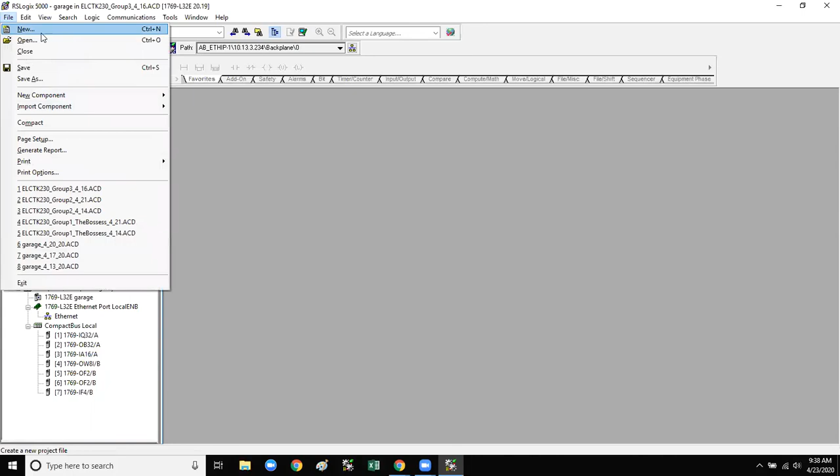Do you remember how to do that? Go to main program on the left, go down, down. I had not seen it, under the folder tasks, main task. There you go, stop, go to main routine. Right below, yeah, really hard to see. There we go, all right.

No, I don't remember that. All right, so we have two exhaust fans or just one? Those are move bits for our one exhaust fan.

5-second timer. So we have our green push button in, right? Yeah.

So the problem we were running into last time is it is off. The done bit goes off for such a short period that it just restarts the timer on delay. So you're gonna need to figure out.

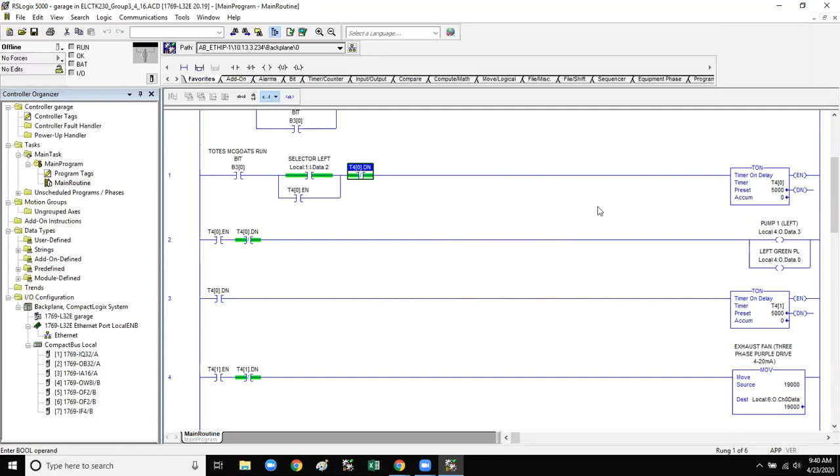Do you guys want to run it and see what it's doing? I remember what you're saying, Nathan. Yeah, go ahead and run it. Give me just a sec.

Gotta go get a tissue.

No, no. So go back, no, all right. Just let go, let go of the mouse. All right, I am, I will save you. All right.

When you hit upload, you're taking whatever program is in the PLC and pulling it into your file. Oh, I thought that was downloading. If you would have saved that, you would have erased your program. Yeah, it is the opposite. I forgot.

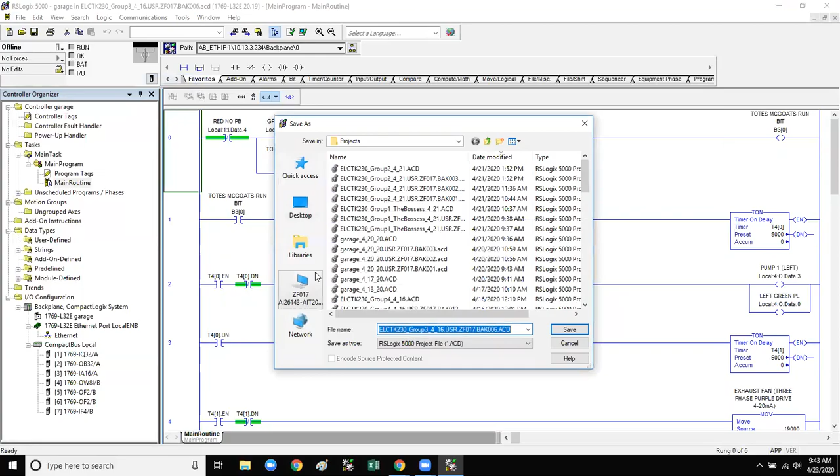Why'd you tell him? What? Why'd you tell him? We could have just stole theirs. Yeah, you're right.

Why is the name invalid?

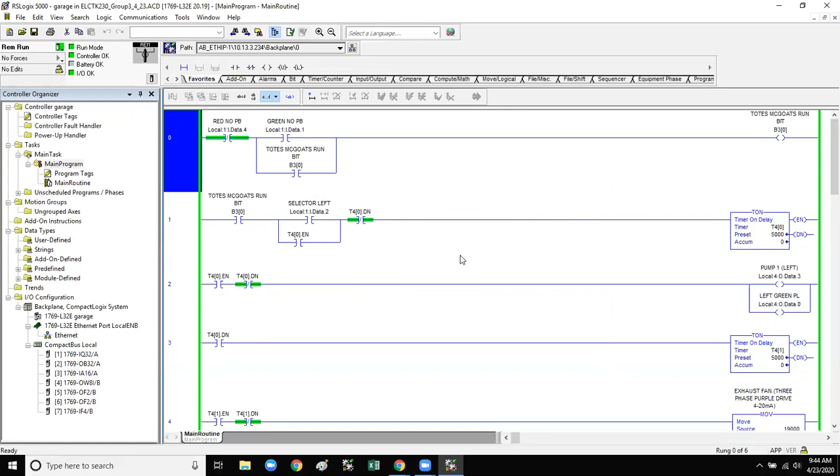You need to figure out how to turn it off completely without it starting back up, because it has such a short delay. So,

And what is that restarting? So our timer T4[0] done bit is like, what is that controlling? Huh? Oh, so our pump 1. Yes, yeah, it controls pump 1.

And so the done bit, I don't know why I don't remember. No, it's fine. The done bit, basically, what will happen is it won't turn it off because it's such a quick response time that it just energizes again real quick and enables it so it never hits a done bit.

So the alternative is... add another timer? No. Well, yes, we could do that. Or, or a counter.

Sorry, my dog just threw up on my blanket. Yeah, we could do a counter. We could do a jump feature where...

Wouldn't that just restart it all over again? Timer? Because you'd jump the logic down to where you see that T4[1] done bit. Yeah, and then they'd work off each other.

But we're not there yet, we have to figure this out. I wish that logic worked. So...

Hey, we got it. All right, what are we doing? Oh, we got to run it. Okay.

So what is it supposed to do now? It's supposed to pump water into one tank, heat it up, and then pump water into the other tank and cool it down.

As of right now, I thought we just had the left selector switch running pump 1, and then that would turn the green light on. And then, yeah, we do. That's all we have run for right now, pump 1, the exhaust fan will run. Left.

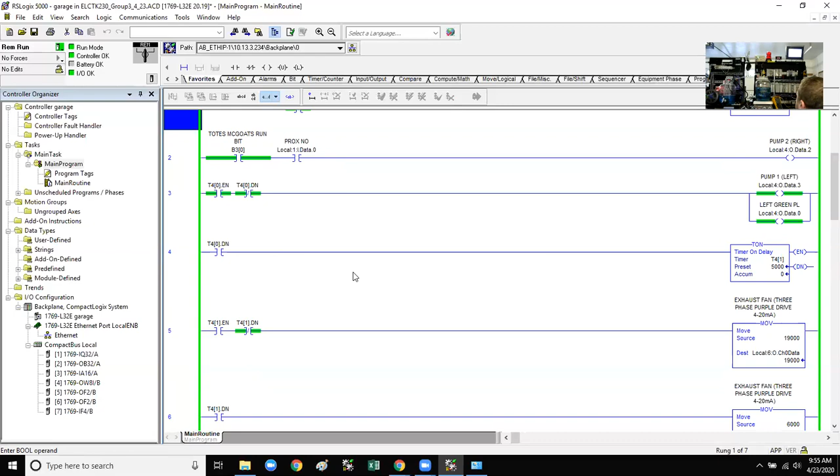What's going on there? Don't know. Where's pump 1? Pump 1's on rung 3. T4[0] enable.

Is it because... rung 3?

Alright, so on rung 1, that turns it on. And then would the done bit in rung 3 just reset it? Like we keep it on? But no, because the enable bit on rung 3, the way I'm seeing it, nothing is shutting off pump 1, which is on rung 3. It's just the enable and the done bit.

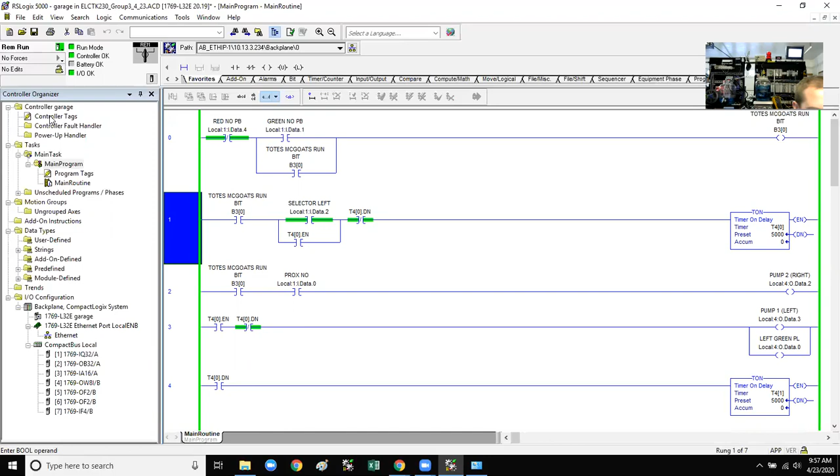Is it because the run bit is on rung 1? What's the run bit? What's that controlling? It's not the pump though. It's like... no, control on. Okay, alright. So pump 1's only on rung 3?

Yeah, pump 1 is only on rung 3. The left green pilot light turns on. I'm not sure what we're doing with T41 down here. That's our... that will control the exhaust fan.

But I guess we could just use T40 because it's also 5 seconds. So the exhaust fan is supposed to be on while pump... After 5 seconds of pump 1 running, the exhaust fan will run - oh, for 5 seconds, I got you. Well, let's not worry about any of that right now.

We got to figure out why this pump is not turning off. Pump 1 left, T40 done. I guess, why does it keep...

Why does it keep counting? It's like always enabled. Not sure.

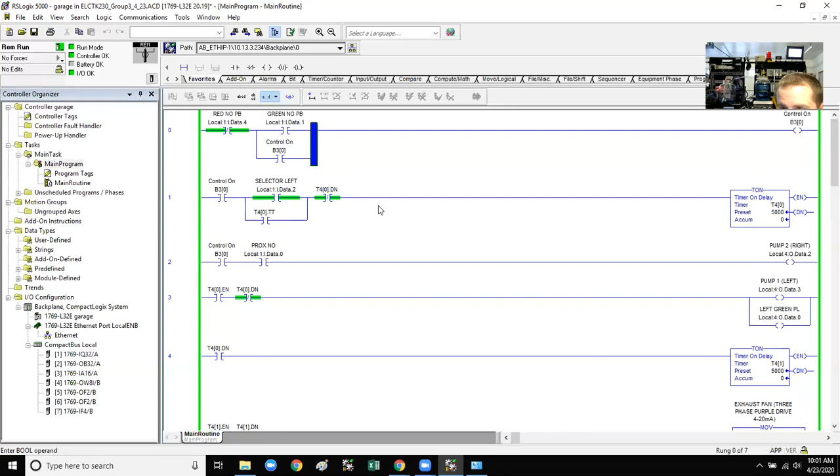The fact that that selector left switch is... Would it be easier if it was a push button? Yeah, it would be easy. I mean, we can do this. I'm just saying, why don't we switch the selector left to a green push button, and so on and so forth.

So we need to change this. But would that mess up our right selector switch? Wouldn't we run into the same problem? Well, what we can do is have selector switch left be pump 1 process. Okay.

Couldn't we just hit the selector switch left for 1 second? Or would that just be too complicated? Well, then you're relying on the operator to know that you can only have the selector switch in that position for a couple seconds, and then you got to turn it off. That's fair. It doesn't make sense.

So why don't we say selector switch left starts the pump 1 process. Green push button runs pump 1 for 5 seconds - left green. Okay, so then all we have to do is change our green push button. We have a green push button as control on.

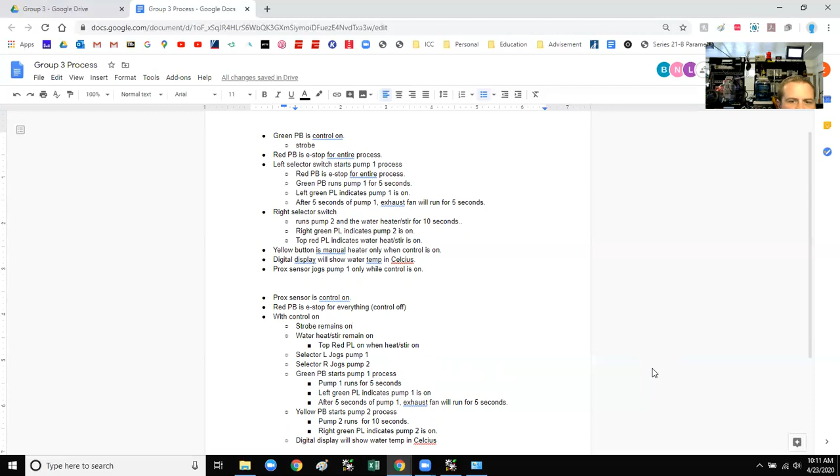Okay. We got a lot to change. Yeah.

All right, Brady. All right. So first step would be control on with the prox sensor. Hang on, I want to move this so I can read it while you're working. All right.

Yeah, I'm kind of doing the same thing. So, all right, if I can make this bigger, if you want. All right, cool. All right, so let's just go rung by rung then.

So rung 0, red push button. You got a control on bit, so that's good. We have the red normally open. We do have prox sensor. So just change - green push button with prox sensor.

Yeah, and do you see the prox sensor on rung 2, you can just drag it up. Yeah.

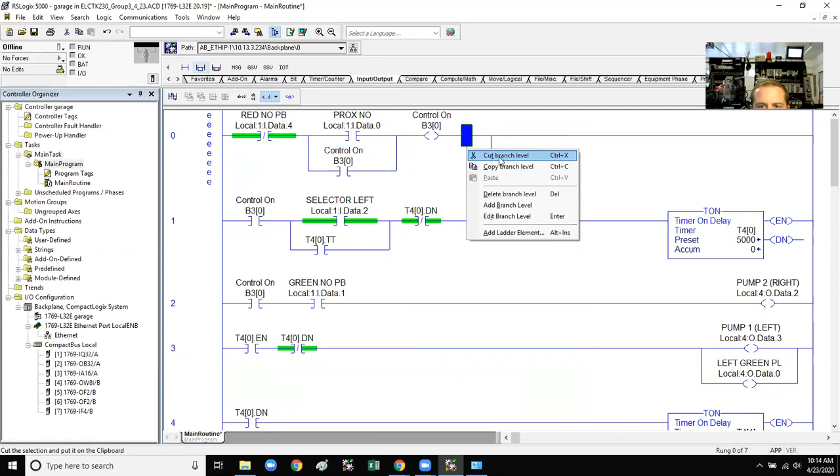What are you doing? Wait, why'd you delete it? Because I had a branch right in the middle of the logic. Well, if you move the B30 where it needs to go, then it'll move. What are you talking about?

Not that one. Put a parallel rung around that one. Yeah, we need two outputs on there.

Then you put the heater in there. Is that good? Yeah, just grab the output energize instruction. It'd be under favorites. Right there.

Let me look it up. I have it opened already. The heater is module 4, channel 7. That one right there. Hit that little arrow right there. Yep. There we go.

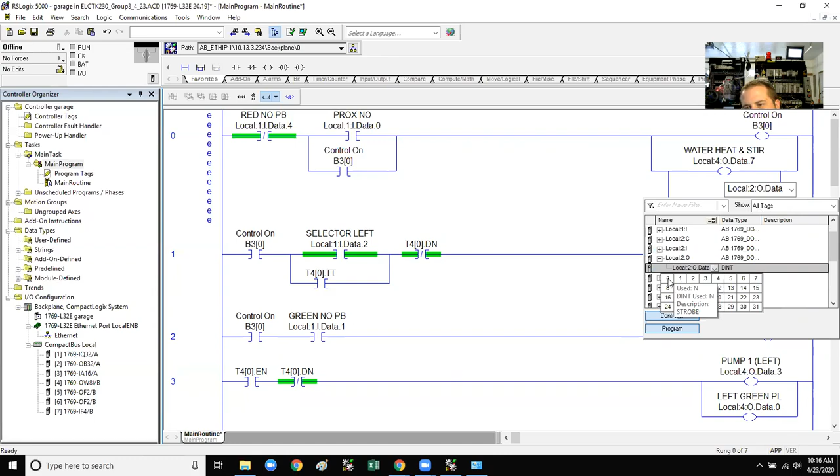And then we want to add the strobe light. The strobe light is module 2, output 0. What does it say? Fault to output, read back? Yeah. 0. Yep. So now let's get back to figuring out why.

Take the selector switch off and then make it a push button real quick, and let's see if that works.

Before we run it, change the timer timing. No, that's fine. Get the normally open, get a copy of that from up top. Which one, the control on? We need a new examine if closed and examine if open.

Selector, right, to jog the right pump. Right there, you were over it. Which one, the pump down 2? There, yep, right there. All right, so then you're going for selector left, which is module 1, channel 2. It'll be an input. Yep. Oh wait, module 1. Yep.

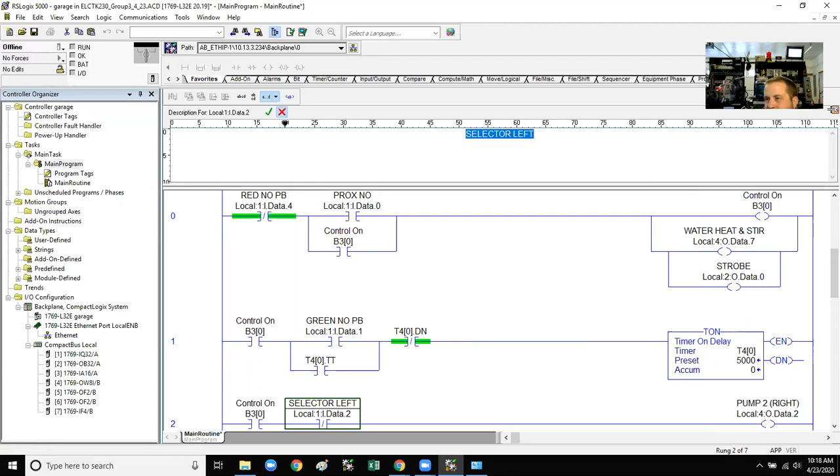Let's do... no. So selector right is module 1, channel... give me a sec, sorry, I have multiple tabs open right now. Right is 3. All right, I have a tab for that process. Selector right needs to be examined if closed.

How do I change it? Double click on the instruction itself. Double click on that. Just change the O to a C. Yeah. All right.

Let's give her a run, so that's pump 2. You want to run it now or keep going? Scroll down just to see our logic real quick.

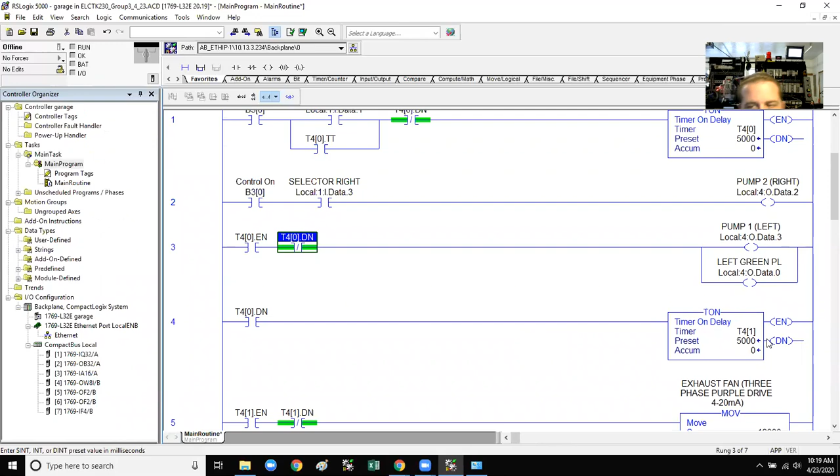So we got it. Right now we pretty much just have timers controlling the exhaust fan. We got the exhaust fan running on a 5-second timer before the new process.

You want to download it? Let me have it back real quick, there's something I want to add just for me. Are you ready to roll? But yeah, we can test it so far, just make sure everything's okay. I just want to add a couple of things here. Man, my mouse is not working.

What do those E's mean? Means you're editing that rung. Oh, that makes sense.

Let's see, so this is going to be... All I'm doing is bypassing the drive enable. Every time you power off the drives, it faults out. Yeah, we noticed that when we were actually in class.

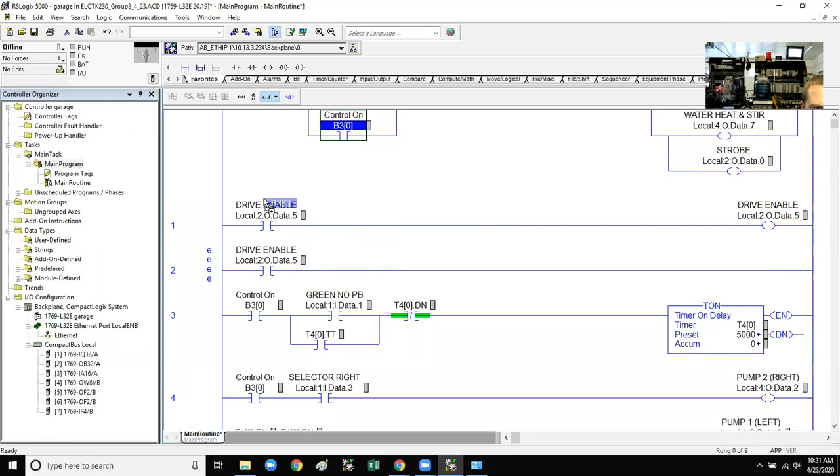So I'm gonna... so you add those before what? With control on, I'm gonna enable the drive, and then all goes off. Maybe I don't need to do that one. So do we have to do this for the other drive too, or does the other one have a frequency drive? No, it enables both the drives. Okay.

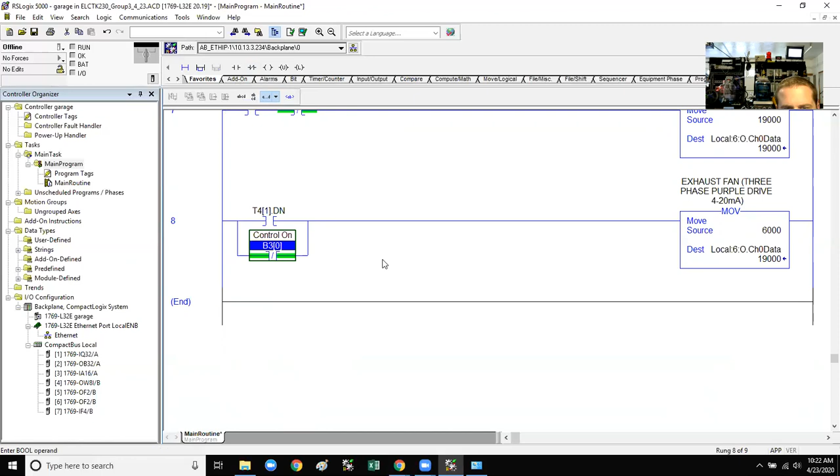So how's everything in Zach's world? Mine? Yeah, that's going.

All right, so now when you hit control on, it should enable the drive. Anyway, let's test this thing out.

Control on. Oh, that's the prox. Prox is on. Water heat, oh, I forgot that's what happens. Water is heating and stirring. Drive enable, if I hit selector right,

Runs that pump. I can't see, is it grading it? Yeah, it's pumping from the right to the left.

Are you guys able to pin the video? Yeah, I just did. So you can see it moving then? Yeah, I see, did you too? I would like it to get down to that bottom line before we run it.

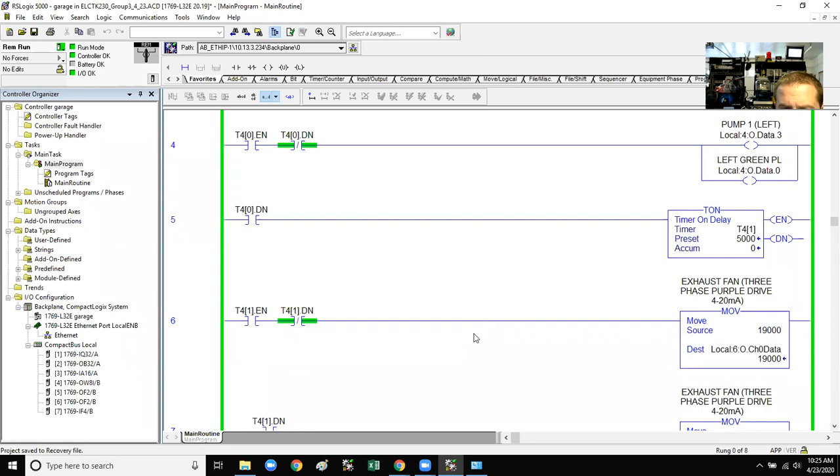There's no 10-second timer. This one never started, T40. T40 never enabled this timer, or did it? 40. No, because pump 1 has to be on, right? Well, pump 1 came on for that 5 seconds and stopped, so that was good.

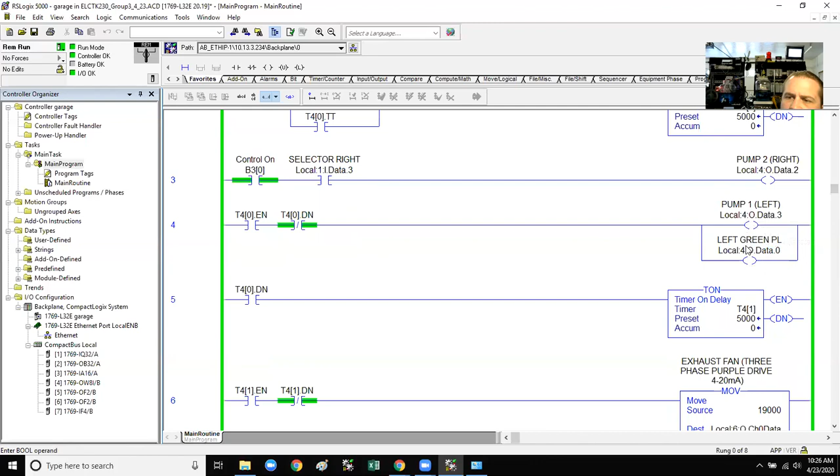The exhaust fan came on when T41 was enabled, so it was enabled. Then it stopped after 5 seconds, though, right? Or I didn't really pay attention to that part. I just paid attention to the pump.

Not sure what's going on. In our new process, is that what we want? So the strobe is still on, and is the water still heating? Yep, it's just these 3 rungs that we're not getting anything. I'm gonna run it again and see if this timer ever takes off running. I feel like it had to have, because this wouldn't have moved this number to turn the fan on unless this bit became enabled.

I guess just watch rung 5. All right. Stop. Turn it on. Pump one runs for 5 seconds. When it's done - well, the exhaust fan came on right away. The timer never started.

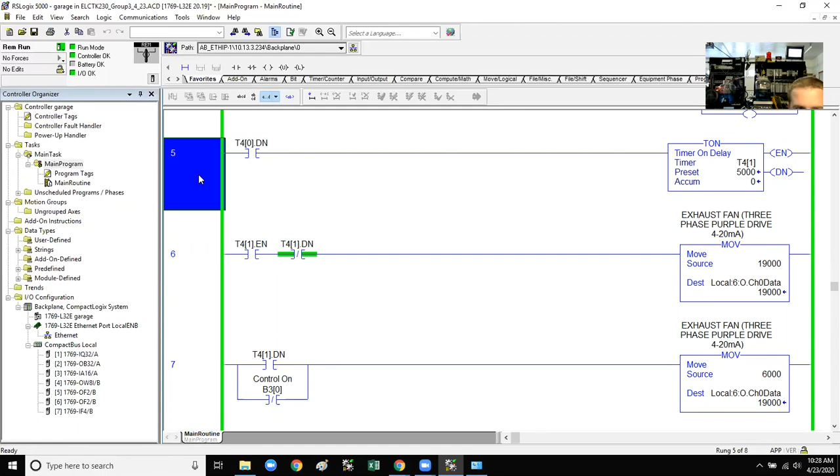I don't know, so I'll stop. Do I have control? Yep, you got it. All right, what am I looking for? Can I? That's a branch. It's really hard to see. You want to go offline first, Brady? All right.

Forgot about that, then that's a branch. And then add a timer timing of T41. Could I just do the drop down for that, or would I? You can type it in manually or drop it down, whatever's easiest. So, T4...

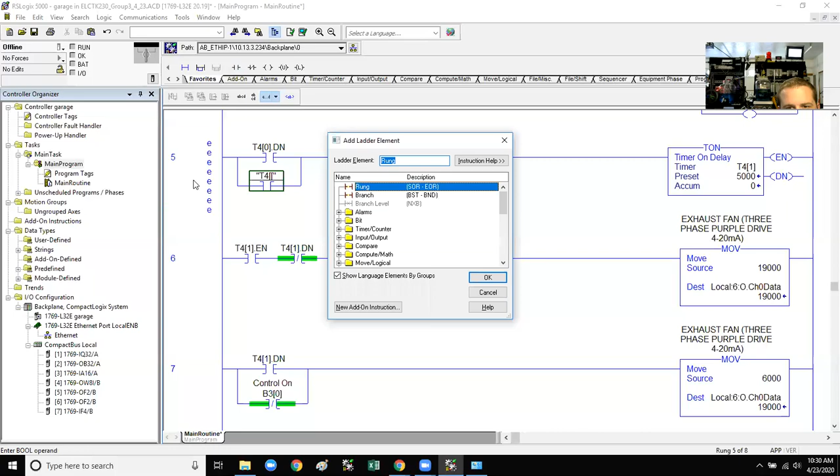Wait, it's T41, right? Or T40? You're in Input? Yeah, I see. Oops. All right, you know what, let me just find that on my keyboard. T4 bracket 1. Why don't I know... T4, whoops. T4, 1, right? Sorry, I'm messing with you. Oh, you're good.

T4 bracket 1, dot TT. TT. All right, cool. Try it again. Yeah, should try it again. Download it? Yep, download it.

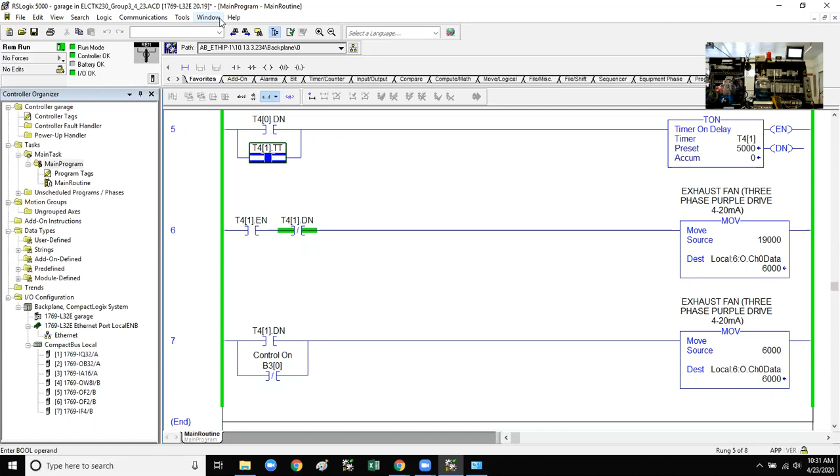Remote run. All right, ready? Yeah. Keep forgetting that it's the prox sensor. One, two, three, 4, 5. There we go, there we go. 1, 2, 3, 4, 5. There we go, all right, we're good. Cool.

So the only thing I think we should add is, let me have it back, Brady. All right, got it back. Okay. The only thing I think we should add is we got that. We need this top red pilot light. Eventually we'll get selector left to jog pump 1. Tell you what, since it's after 10:30, I'll just highlight these, and we'll know that next week this is where we got to start. All right.

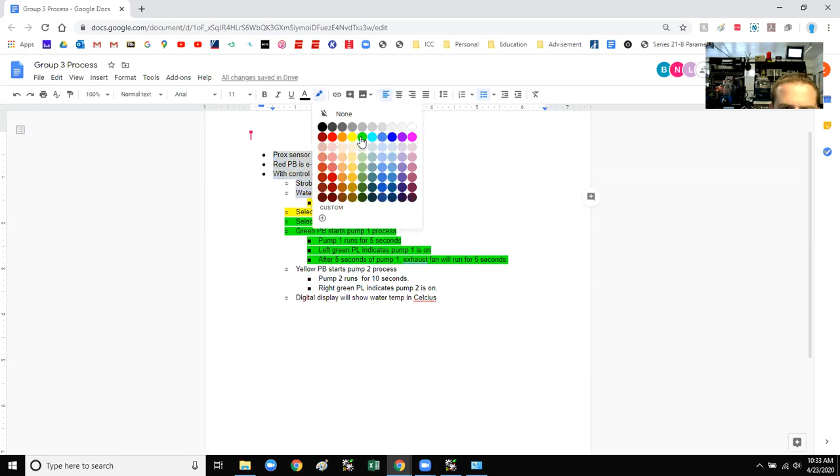Who let that woman in? You guys still beefing? We're always beefing. Fuck you, Nate, she didn't play video games with me yesterday. When? All day I was waiting for you to get on and play video games with me, but you were like... You never asked me to play video games. I watched Hulu all day, so I actually was on all day. Whenever I got home from work, but that's basically all day. Did you get a new... All right guys, that's where we're at.

All right, cool, cool. We only have a little bit left. Did we graduate? The digital display is going to take some doing. Yeah. I'm not controlling my screen still. It says you are controlling Zach Flynn's screen. How do I undo it? You just stop. There, now I'm doing it.

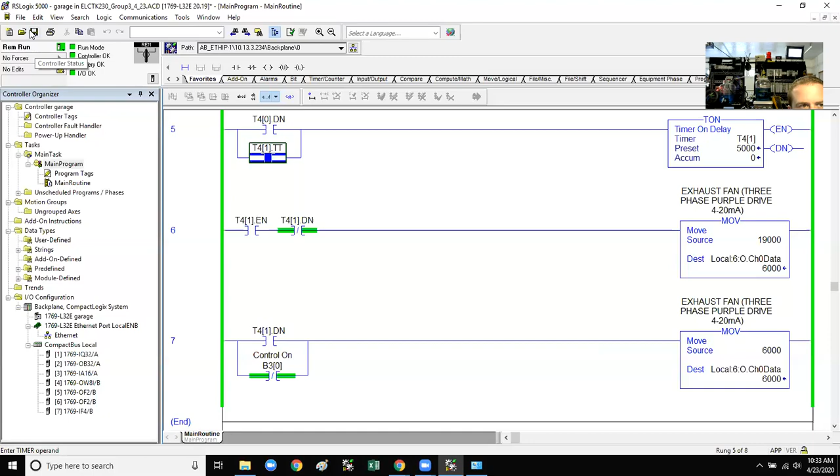So, Zach's also in here. Hey, Zach. Hello, what have you been up to recently? Not much. All right, well, I'll see you guys later. He's still too heartbroken that Lego Star Wars hasn't come out. Yeah, I don't know what's going on with that. They haven't even announced it. What in the world? They didn't push back Animal Crossing, why would they push back Lego Star Wars? I don't know, they haven't said a release date. Or Cookie Mama, they're making a Cookie Mama for Switch. Bye Zach, bye Kenzie, bye Nathan. See you.

All right, group 4, is everybody here? Except for Tyler. Yeah, I'm here. Yeah, Tyler ain't here.

Though my stomach's a little screwed up today, so I might be in and out. Damn, Don. TMI, Don. TMI.

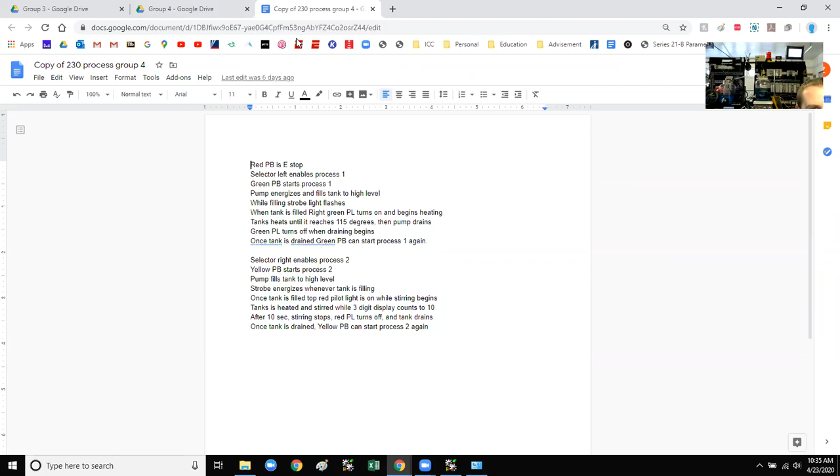Does somebody have this screen open? I'm going to move it so I can read it while you guys are working. Somebody should have the process open, and somebody should have all the inputs and outputs open to help the person.

Programming, yeah. Who's programming today? Zach has the paper. Someone else had the doc. No, I think Zach was the one. Zach did both but hasn't done any programming yet. So Zach's gonna program today.

Zach, okay, that's so exciting. Yay, yay, notice me senpai. All right, I need to open up group 4.

Yeah, I'll be right back, I forgot something. It's an everyday thing now. I'm so sorry. I said it's an everyday thing now. I'm gonna save as... 4... 23.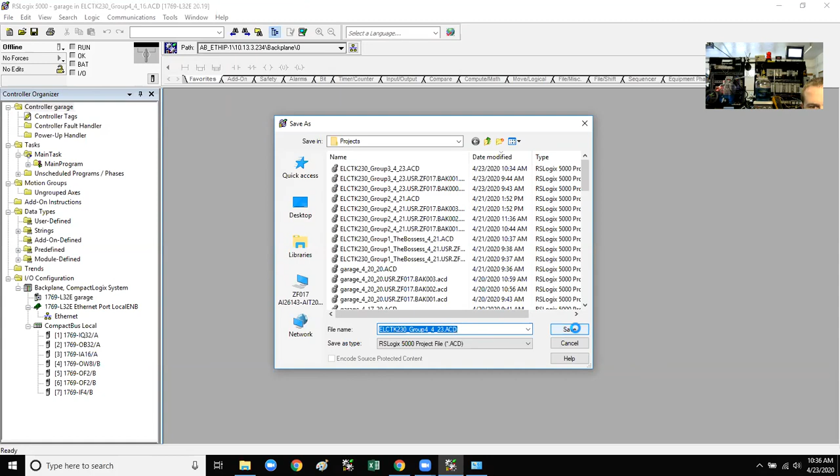Let's see what you guys got. Green normally open push button. Red push button is e-stop. Selector left enables process 1.

I don't even see the selector switch in there. We never put a selector switch in. Last time we were doing this, it was just the green push button fills it, and then after it fills, it's supposed to drain, I think that's what we're doing. I know it's supposed to heat up, then drain or something like that.

What did we need a selector switch for? Because we have 2 processes. When you turn it to the left, it does process 1. When we turn it to the right, it does the other process. Oh yes, but you're using the yellow button for process 2. Yeah, so you could have both those enabled.

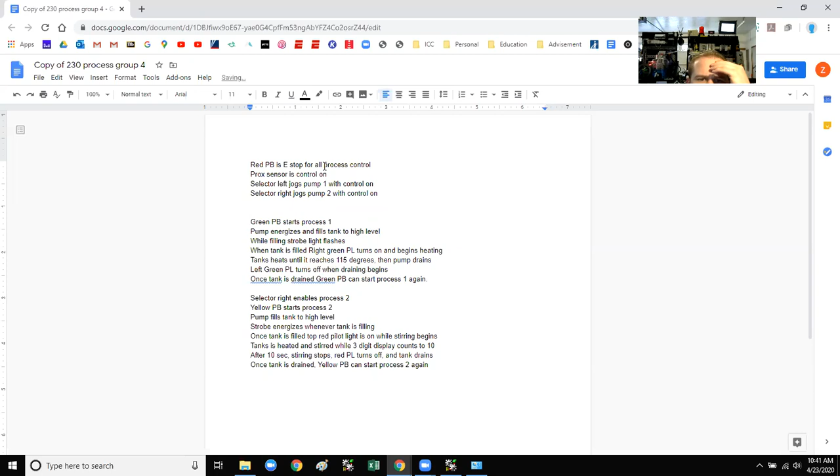Jogs pump 2 with control. Should we have a pilot light when the control is on? Yeah, well we have the strobe light whenever it's filling, like whenever it's on. While filling the strobe light flashes, right, green. So this is, I'm assuming, left green. Strobe is energized when it's filling.

Red pilot light, we'll make this the top red pilot light. Are we using the bottom red pilot light anywhere? No. All right, let's use the bottom red pilot light to mean the control is on.

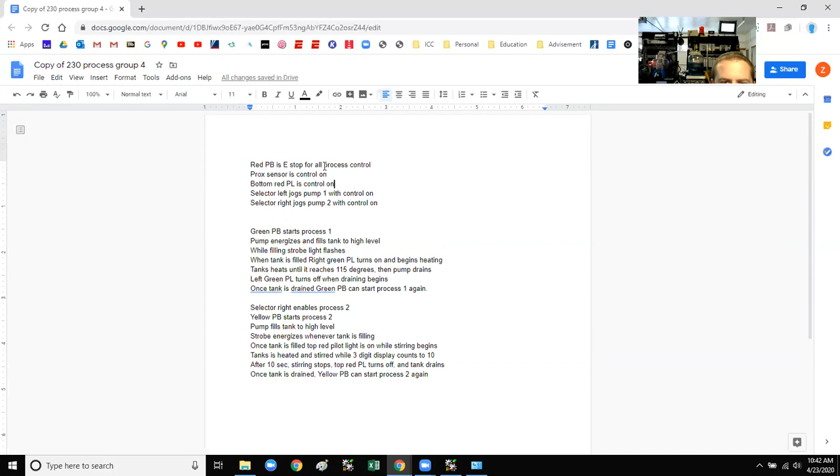If you open up this same file in the shared drive, you should see those changes because it automatically saves. Okay, so before we start, let's change all this stuff. Let's just go rung by rung and I'll do it for you so we can move through this change quickly, but we need a control on bit, right?

One thing I'm gonna do too is, do we have any binaries being used yet? Um, I think so. Actually, I'm not sure, yeah, I don't know. I don't see any, so this will be control on.

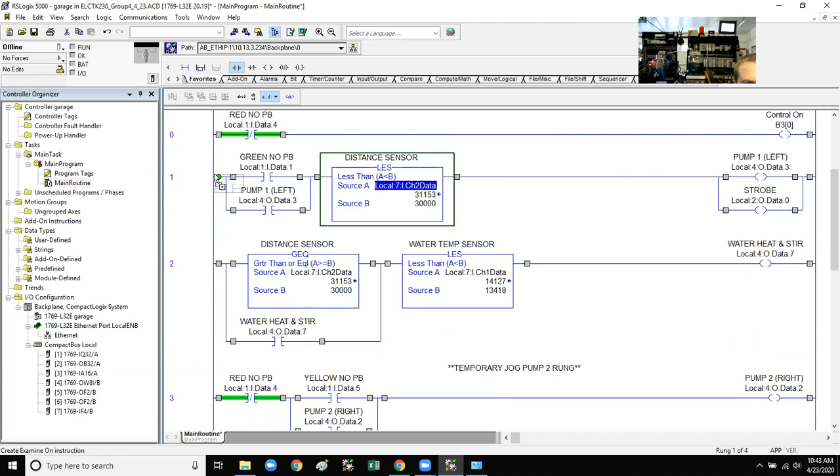What's going to prox sensor is control on? So what's the prox sensor? Anybody have it open? No? Okay, I found it.

Control on green push button. Oh, what else do we need? Bottom red pilot light.

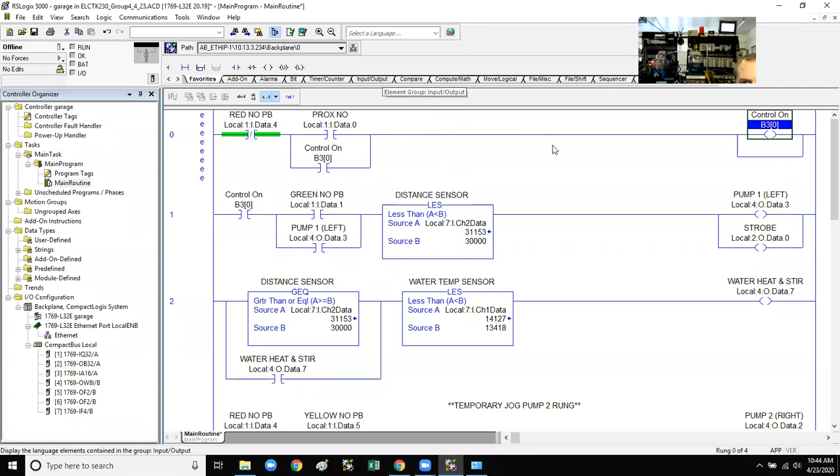Is everybody following what I'm doing? Yes, because I'm moving quickly - I want to get you back to where you were. What's the bottom red pilot light? Found it. What else?

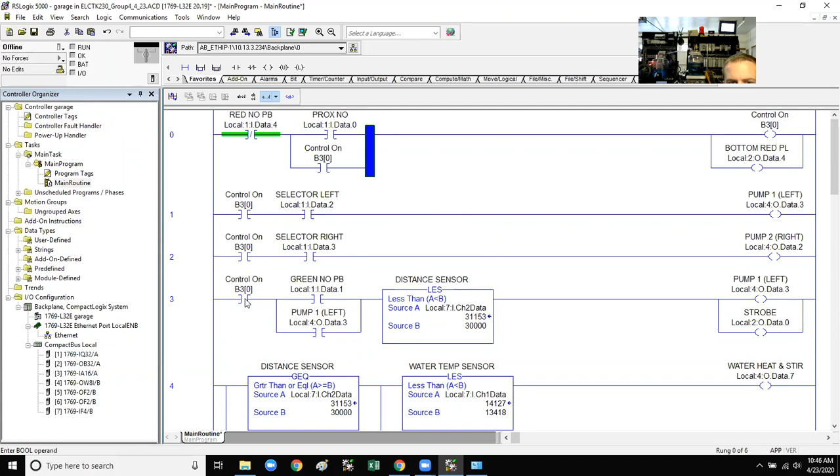Whenever pump 1 is on, the strobe light's on. Okay, so here's what I'm looking at. You don't want more than one rung controlling an output. So I'm going to take this jog rung and just apply it to rung 3.

So I'll put selector left parallel around all this. And then we'll put an interlock in there so that the right pump will not energize at the same time. Does that make sense? Yes.

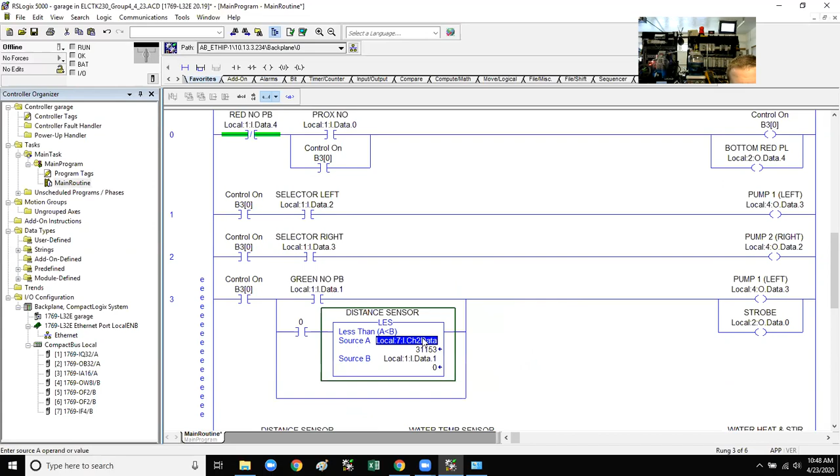Control on, selector left will run that pump. Green push button will turn it on, and this will hold it until this turns it off. Right? Does that look like it's gonna work? Yeah.

And then we need an interlock saying pump 2 is not on. Yeah, that'll look right. I know I'm flying through it, but I didn't want to waste your time since I'm the one that wanted to change all your stuff. So what is the error? Here. What's the error? What is the error?

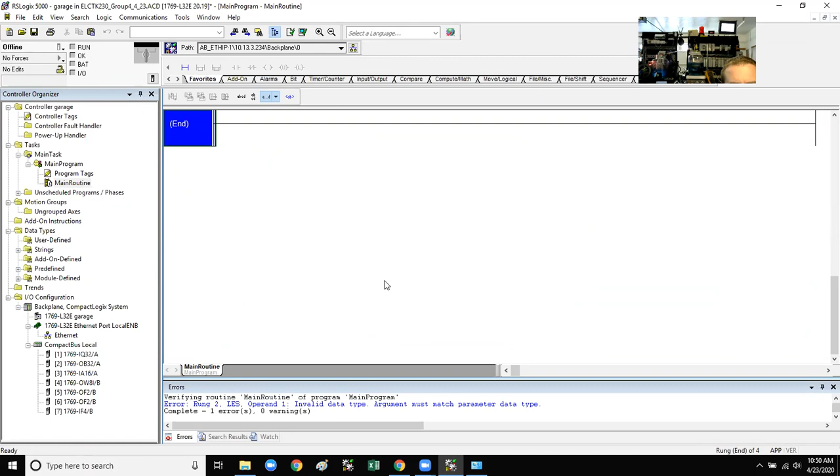Rung 1, output energize. Rung 4, output energize. Rung 2, argument must.

What was this? Yeah, what does that mean? Hmm? What does that mean? If the sensor is less than - what did we decide? I forget. Was it 30,000? Or was it... I think 30,000, yeah. Okay, that did it.

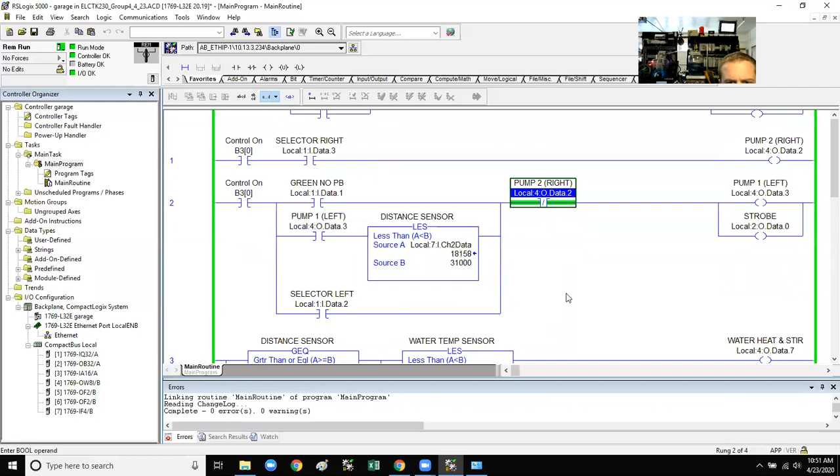All right, so what should happen here? If I... Prox is going to turn the control on and the bottom red pilot light. Control is on, and I can jog the right pump.

And if I hit jog the left pump... oh boy. What happened? I just went to jog this.

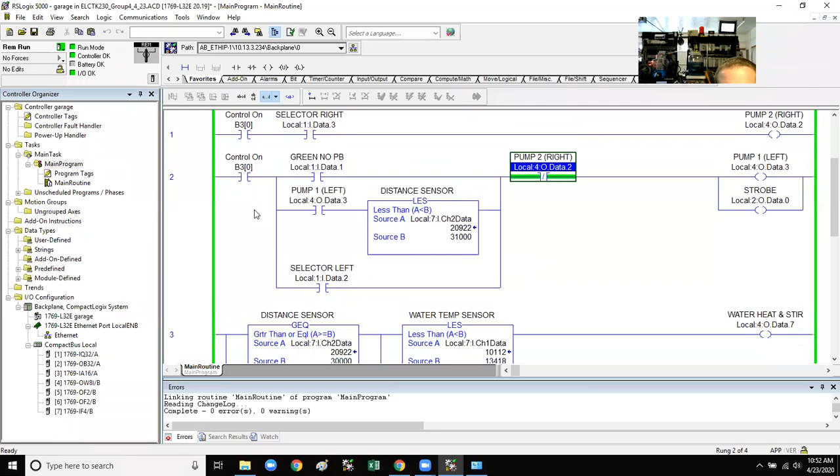Okay, you see what happened? I had the control on. I went to jog this, and it turned the pump on, but I couldn't turn it off. I turned this off because this energized, and this was less than 31,000, so it just kept running.

So I needed an interlock with the selector switch to keep that from happening. Gotcha. Once I get this fixed, I'll give it to you, Zach. I promise. Okay, take your time. I feel like I'm having all the fun here.

Let's try this again. Control on. Selector left. Uh-oh, still not. Why didn't that work?

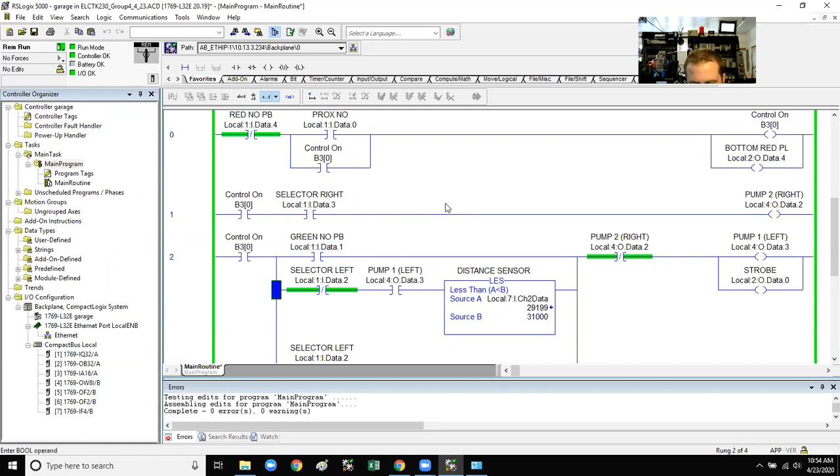Do we have to have a switch on that same rung that can turn it off? Well, I'm just trying to figure out a way I can jog the pump and turn it back off. So I need it to be independent of this stuff. Yeah. Since those are all in parallel, like you have, as long as that's true, you won't be able to jog it and turn it back off.

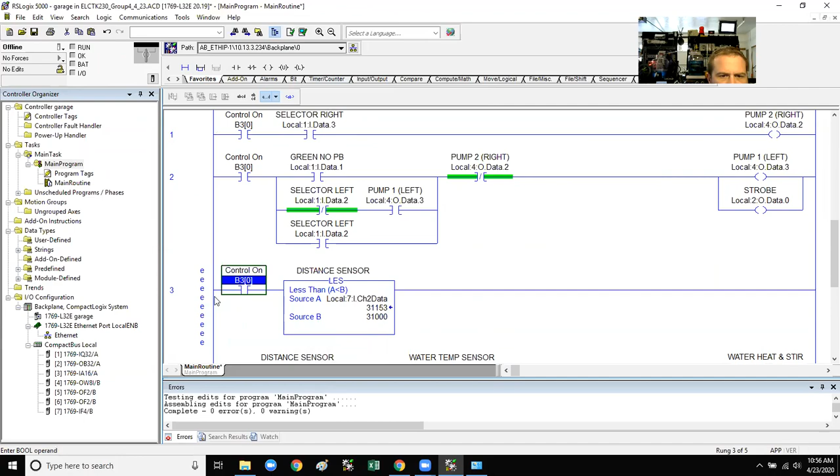Or, does it have to be independent, or can we have a way to stop it before everything goes parallel? What do you mean? So if you have, like, right next to the control on, if we add something right there in that branch before it all goes parallel, that doesn't have to be independent, because it'll stop power before all of those rungs.

Well, I think this will work. Yeah, I'm not saying that won't work. I'm just saying, maybe there's a way to keep them all parallel. I think we just need to have the distance sensor on a different rung and have it controlling a bit instead of controlling the output itself.

Okay, and then we can use that bit hopefully to hold the pump on while we have the green push button energized. I think this will work. Okay, if not, then I don't know what we're going to do. More troubleshooting. Yeah. One, we're using one.

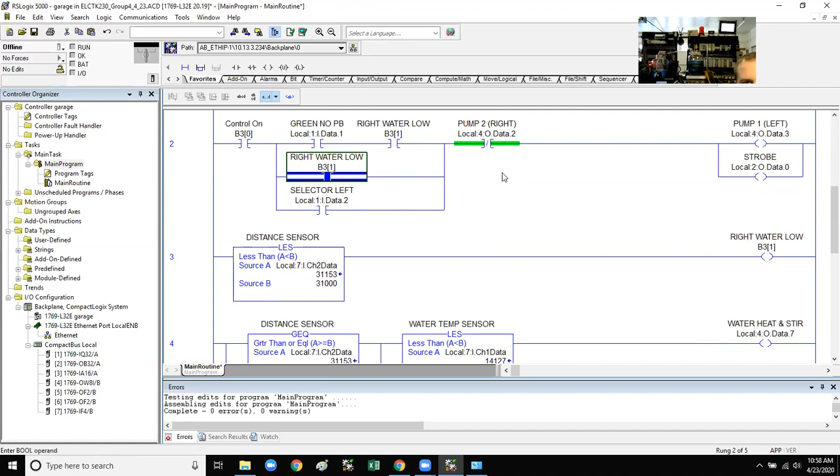I don't know, because having something in series with it on that rung is what's making it difficult. Yeah, but if we have a bit that's controlled by that in series, it's doing the same thing that the actual sensor would be doing if it was still on that line. Maybe, but right now what's holding it is not in series with anything, you know?

Okay, here's what I'm saying, hopefully I can explain this right. Before, this was here, and this wasn't here. So when you'd hit the button, the pump would keep it on, this would keep it on, and I didn't have a way to shut that off without hitting the stop button.

By moving it down here, what I'm hoping will happen is energizing this bit. I can have this on its rung all by itself. So when I energize this, if this is true—which right now it's not, I'll have to jog it back the other way—if this is true, I can hit that button and the pump will come on and it'll stay on.

This bypasses the green push button. So this is like a seal in. It'll stay on until this becomes false. On that whole thing, I can jog it by myself if I want to.

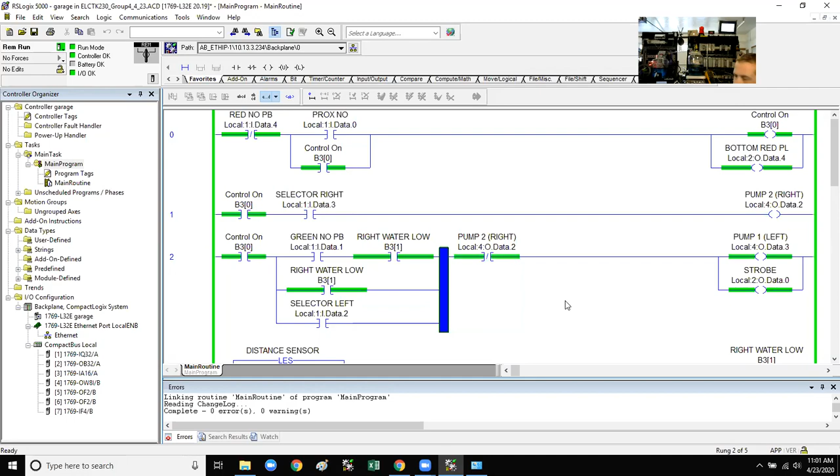Yeah, it's doing the same thing as if the distance sensor was still on that rung. Why are you yelling at me? That's the quietest I've spoken all morning. Yeah, that's not gonna work.

So, okay, so the green push button is what you're trying to use to stop it? No, we want this to work. We want it all to work, but we also want a way to jog it, to turn off, right? And so what button are we using to turn it off? We're using the distance sensor to turn it off.

Okay, so should we have a greater-than bit running before the 3 parallel rungs then? That's normally open—no, that would be normally closed, right? And then if it turns greater than that, it opens everything after that on that line.

Which rung are you talking about? I'm talking about before those 3 rungs. If we want something to stop it completely, shouldn't we have something right there? Yeah, where your mouse is, because it eliminates the possibility of one rung keeping it open.

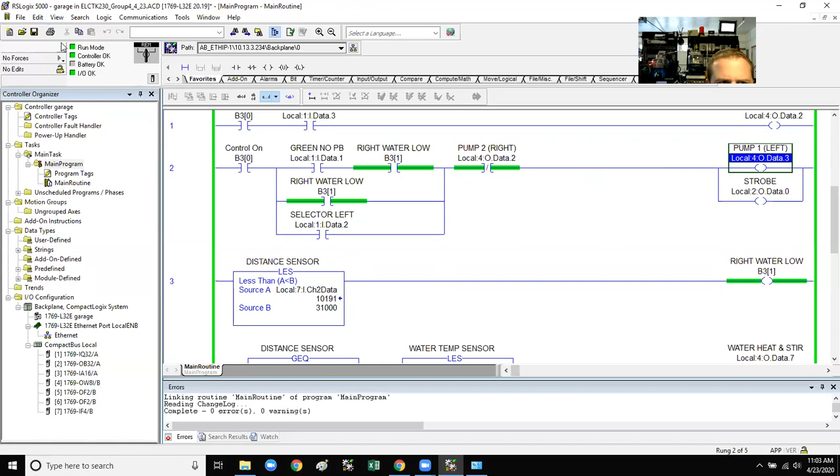I'm not sure I follow you. If we want something to eliminate the possibility of those three rungs turning on, we need something next to the control on bit before those 3 rungs that could turn off all 3 of those, so that there's not a possibility that the middle rung or the bottom rung—

Well, isn't that what the red push button is for? Because if we hit the red push button, it's going to kill control on, right? It'll kill everything. You know what I mean? Yeah.

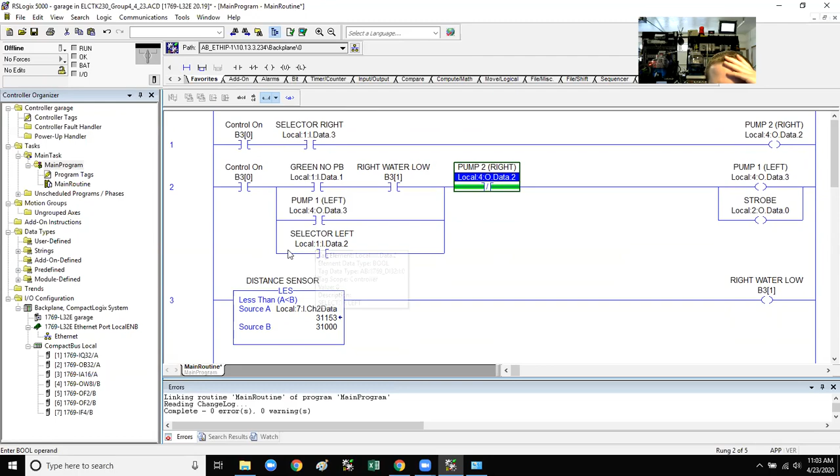I don't know, wait—if opening that kills it, shouldn't that control on bit on rung 2 be normally closed, so that as soon as you hit it, it opens up? I'm not sure. Because normally e-stop buttons are normally closed. So if that's our e-stop, it should be normally closed.

And we can do it this way. It's just we won't be able to jog it if it's above the high level, and I guess that's fine.

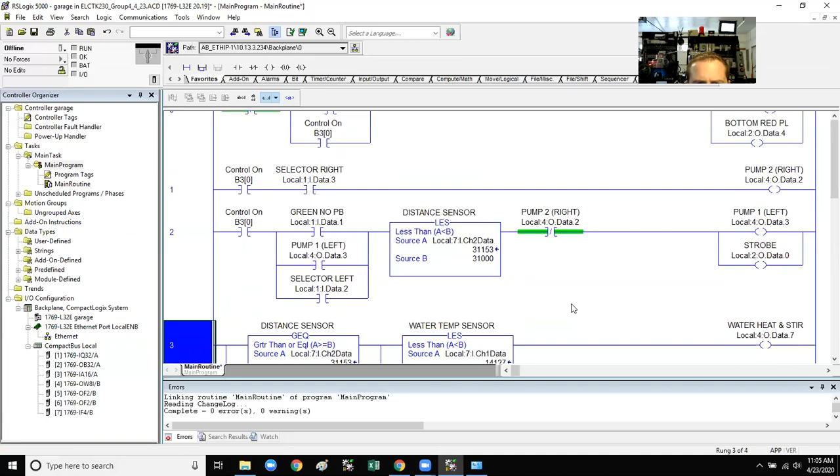Do you understand? I was hoping to have a way that we could. Oh, Tyler's here.

Maybe this is what I was thinking of. Maybe, just maybe, this will work. Maybe this is it. Hopefully, cross your fingers. Gotcha.

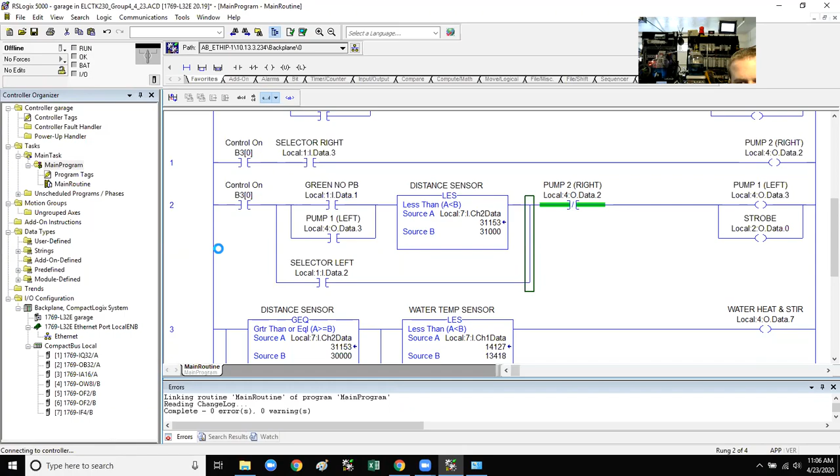Okay, control on. Red pilot light. Selector right. Cool. Green push button, we'll do that later. Selector left. Cool.

Oh, it's still doing it. Damn it. Well, we'll fix that later.

I want you guys to get going on what you got to do. But let's see if the distance sensor part works. So, green.

Wait, I have a question. Yeah. It's still going because that pump 1 left is turning on. Does that mean that pump 1 left shouldn't be on a rung on its own? Should it be behind selector left or behind the green normally-open push button?

Because that's the only rung that's making it go still. So I think if we don't have that parallel, if we have it in series with one of the other rungs, then it should work.

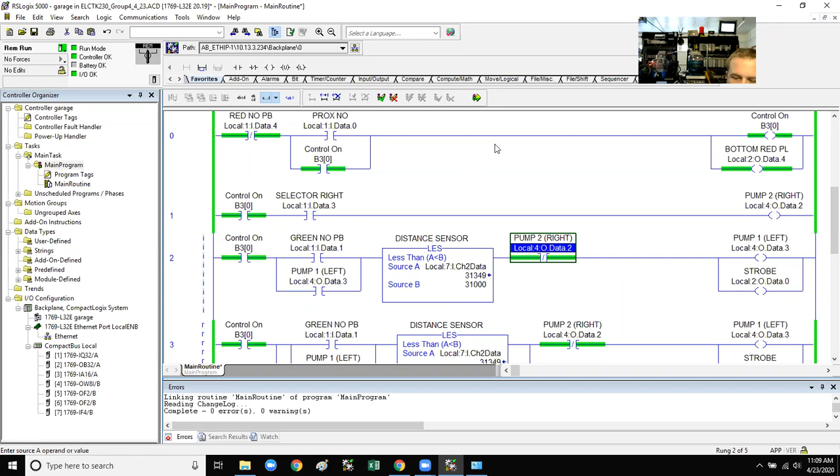Okay, so that's working. Now, what did we have going on in rung 3?

Bottom red, pilot lights, control on. So once it fills up, then it starts heating up. And then once it gets to 115 degrees, it shuts off, I think. Okay, yep, and we already did the interpolating to find out what that is.

115 took a long time last time, so we might want to make that a little lower. It did take a long time. Let's make it, so right now the temperature is at this 10,000 mark. Let's just make it temporarily like 10,500. Yeah, that's cool with me. Just to make it quick. Yeah.

So we had once the distance sensor was high, water heat and stir is on until this, so it should be heating up right now. Yeah, it's just gonna take a little bit. It's gonna take a lot of it.

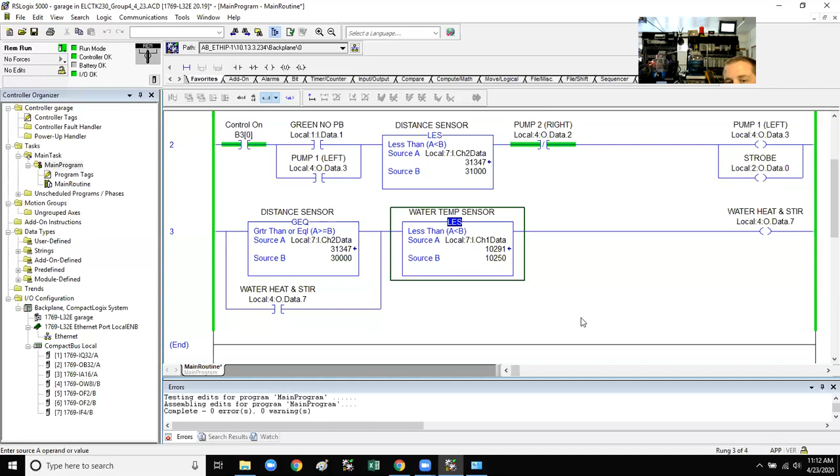Okay, so that's working. Now what? Okay, so once it gets to the temperature, then it starts to drain. So...

All right, I'm gonna give it over to Zach. Okay.

You there, Zach? His mic is on. Yeah, I'm here. There we go.

Okay. So we needed to drain. Yeah, we need to drain. And then we have to let's have a normally open, normally open that closes once that water heat and stir is done.

Okay, so like local 4. It's gonna be an input though. Data 7.

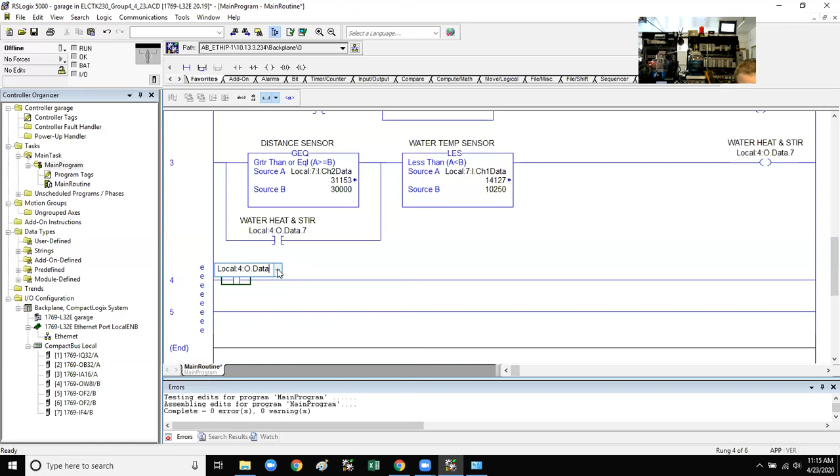Then are you able to like? Oh, can you put 7? Yeah. Yeah, okay. So...

So once that is... wait a second. No, because that would close once that's running. So how do we go about once that's done? Like once that's not running anymore.

Okay, so we could probably do the water temp sensor, if it's greater than, then it can... okay. Yeah, then it can drain, because we know for sure that the water heat and stir won't be running.

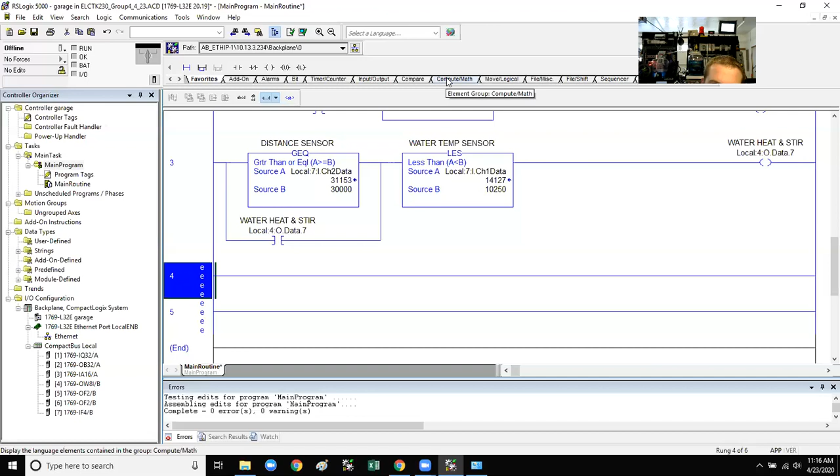What are you trying to do? I'm lost. Alright, so on this rung, once it's done, like once it's to that temperature, then it starts draining. So we have to find a way to...

Activate the pump once the... would it be water greater than or equal to? Do greater than, okay, just to be safe. What...

So you're gonna say the temperature is greater than something? Yeah, once the temperature is greater than what we have it set to be in the rung before this, like the 10,250, because once it's greater than that temperature, then we know that the water heater and stir won't be going.

Okay, but why couldn't you just use the examine if open though? Because if we have the examine if open, then once that's... I mean, because that's not turning on right away. So since we're starting off the process and that's already not on yet, it will energize pump 2 prematurely if we use that.

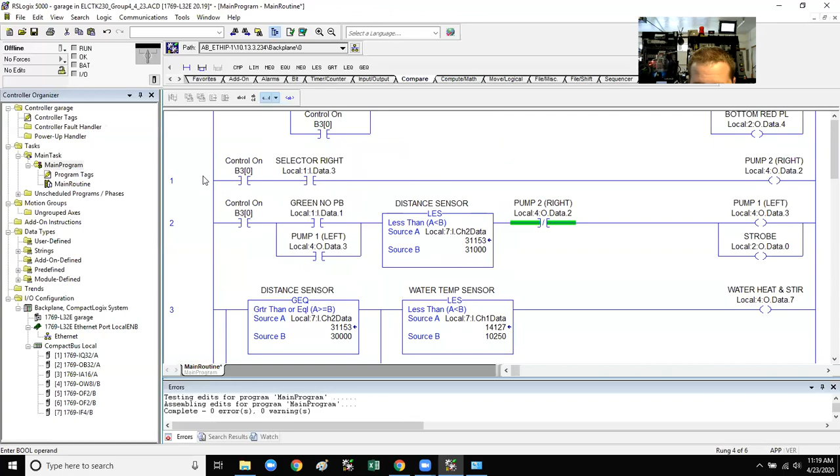Well, let's look at it chronologically first. Okay. This is jog pump, right control, green push button. This fills up, strobe turns on until this gets to a high level. Once it's at a high level...

So if pump 1 on... okay, so if we have a normally closed for pump 1, but then after that we have a normally open for the water heater. So that no, because...

I would suggest we try something and see if we can manipulate it to make it work. Okay, so I would put an examine if open tied to the water heat and stir. Examine if open in here. No, on rung 4. Oh, okay.

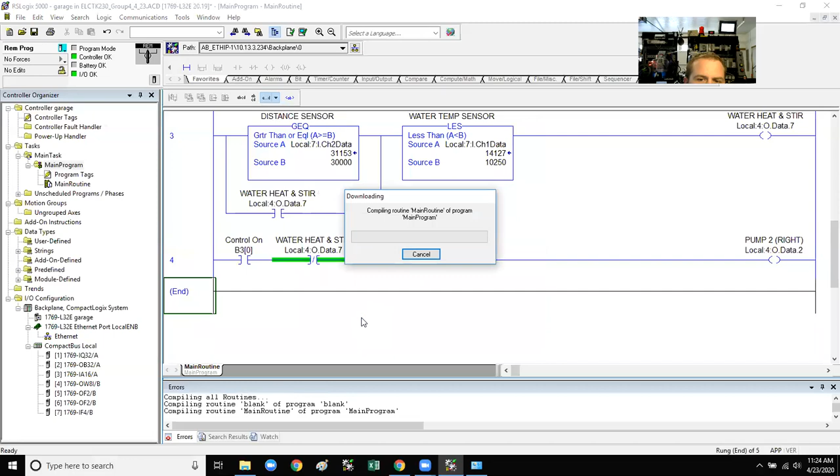Okay. I'm liking it.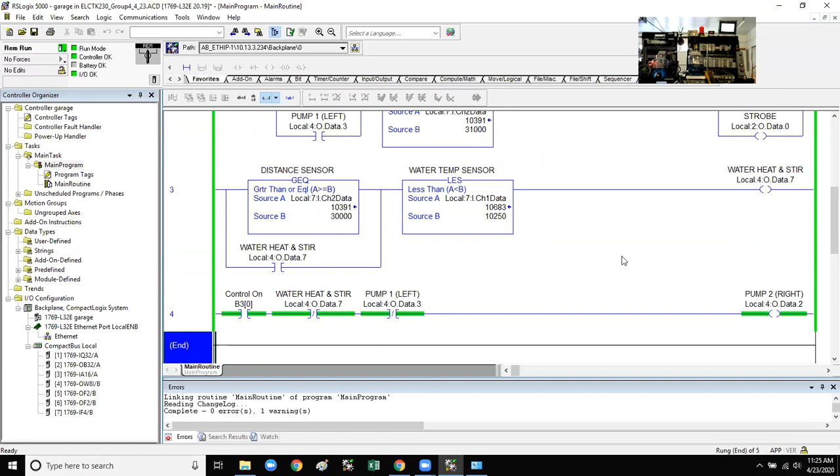But shouldn't pump 1 be on right now? There's relays clicking all over the place. Is pump 1 not on? 1 is not turning on. Okay, so why is pump 1 not?

Okay, can you scroll up before you do that? Oh yeah. Oh, it's because there's an interlock with pump 2 for the rung with pump 1.

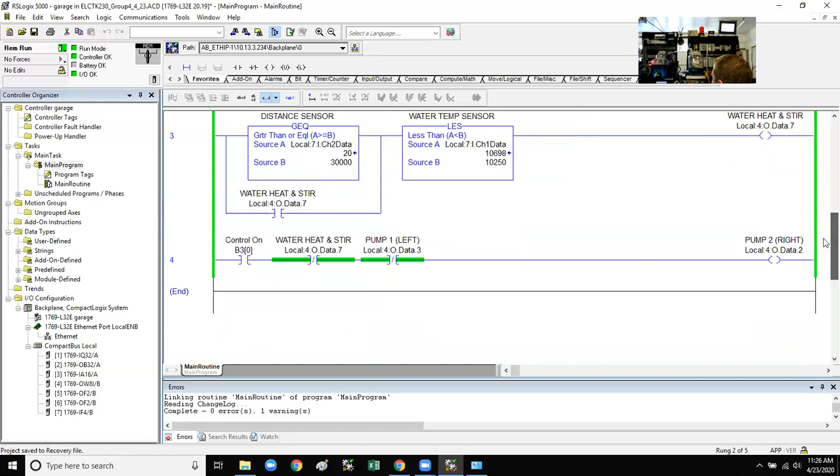Okay, so we have to add something to rung 4 that will make sure that - okay, do you guys see what I mean? Yeah, well, let's look at it rung by rung. When I hit control on, one of the pumps is just taking off running.

Yeah, so since pump 2 is running, it won't turn pump 1 on, which we were relying on pump 1 turning on to keep pump 2 off. So that's where our problem is. So we have to add something to rung 4 that will make sure pump 2 isn't running off the get-go.

Yeah, because whenever it puts control on, since all 3 of those are true, pump 2's on. So since pump 2's on, it's opening that interlock on rung 2, which means pump 1 can't turn on. So, yeah, so what are we gonna...

I mean, we might not need the... No, we would need that. I think we're going to have to use some instructions called one-shot risings to control this stuff because we've got too many things dependent on too many things for it to keep running. Okay. One shot allows something to be true for one single scan.

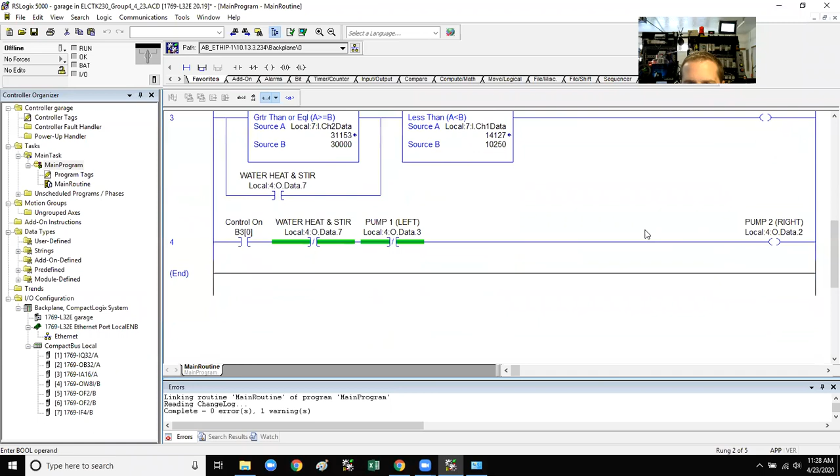So if you're doing something in a process step by step, instead of relying on one output to be done before this one happens, you can use one shots. It's kind of hard to describe now since we're so late in the class period. But I think we're going to have to go back to the drawing board because we're just running into too many problems right away. And why don't you guys do a little Googling and YouTubing on one shots. So there's output.

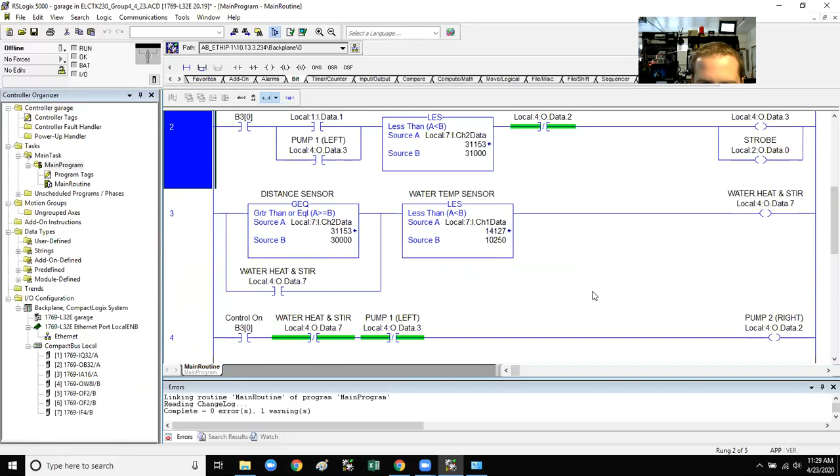This one shot rising, one shot falling. I'd like you guys to look at those for next time. I'm going to play around with this and see if I can come up with a solution, so at least I know what we're working towards. Because right now we're too dependent on this thing being done before that happens.

And then when we want the process to reverse and go the other direction, that's where we're running into issues. I'm not exactly sure what we're going to do to fix this, but let's take the week to put our heads together.

If you guys want me to, why don't I save this rung as it is right now as a PDF, and I'll load it to your group 4 file so you can look at it and see if you can come up with your own solution.

Can I suggest something real fast? Could we take out the pump 1 interlock and put in the distance sensor so it closes from the rung before? Well, that's the problem, because we can't. No, the distance sensor, not the water temp. The pump can, but this is an analog value, right? So we'd have to create another rung and put this in and use like a B3, instead of having a different distance sensor on that rung.

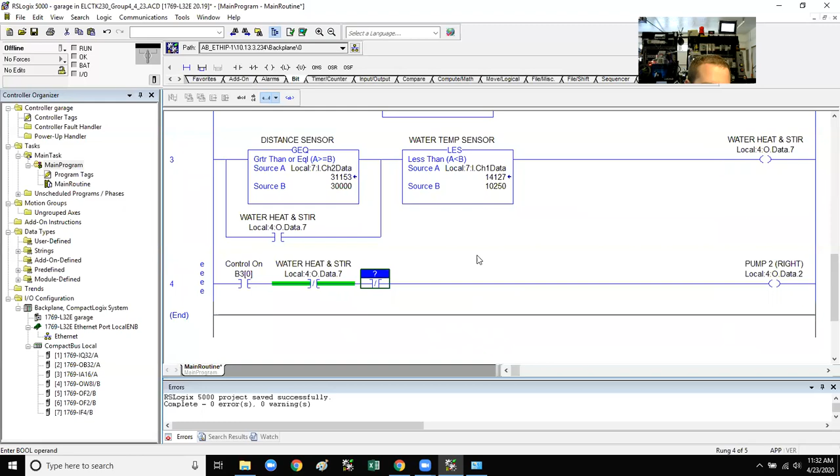There's too much of this. So I think we need to go back to the drawing board and probably end up using some one shots, or another thing we can think about is using a latching output. Let's break this thing down. You've already got it broken down to process 1 and process 2. We could have some control bits that break it down even further, so process 1 fill and process 1 empty, so whatever we want to happen during that process, we can break it into individual sections.

So process 1 fill will be one latching output, and then we'd have something when that's done to unlatch it, so it goes false. Then process 2 latches at the same time, and that process keeps going. So you'd have process 1 fill, process 1 heat, process 1 drain, and then process 2. There's more than one way to skin a cat, but we'll get there.

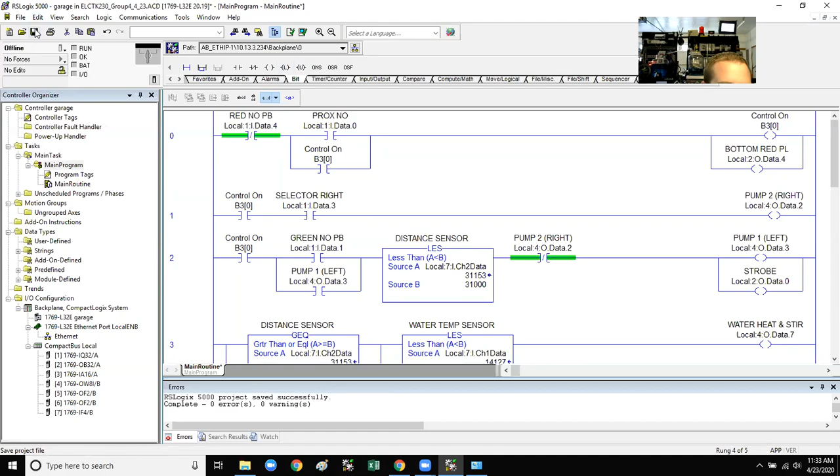For now, I'm going to save this and print a PDF and put it on your shared drive. Any other questions? Not about this.

Okay, where's the other, Don and Tyler? Are you still here? Yeah, I'm still here. Okay, anything else before we part ways? There's just some stuff I want to talk to you about, Zach. Hey, do you need us for anything else? Nope, that's it for today. All right, see you tomorrow. See ya, bye.

So with how packed my schedule is right now, I was wondering if it's possible to drop my gen eds, because I'm in a speech class and a history class, and having those on top of all of these has been really overwhelming, especially in an online format. And that affects me not being able to graduate next month, but I'm honestly completely fine with that. So I don't know what steps to take to drop those.

Okay, give me one second. Things are a little weird right now with the COVID stuff when you want to drop. But the good thing is, because of the COVID stuff, they're doing tuition reimbursement and all that. Right now you're past the dates for drop with no penalty. You know that, right? Yes, I know that. But what will happen is, give me a second, I can't do two things at once.

Okay, yeah, that's fine. 230, group 4, upload file, downloads, group 4, 423. Okay, and then do this and then stop the recording.